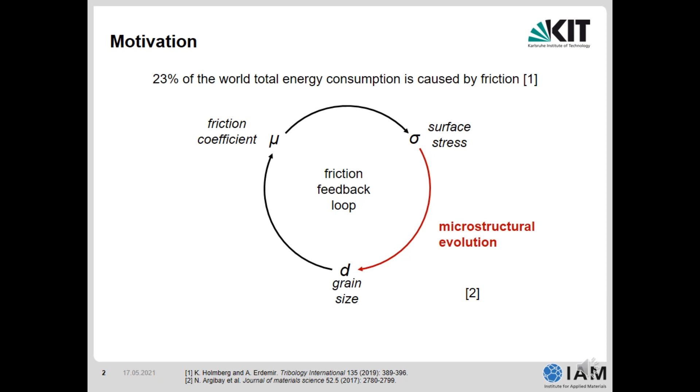In my group, we have a special look on this part of the friction feedback loop, which is the microstructural evolution. And we have a special look on the very beginning of microstructural changes. And so one of our main questions is, how do metals and alloys deform under tribological load after a single trace experiment?

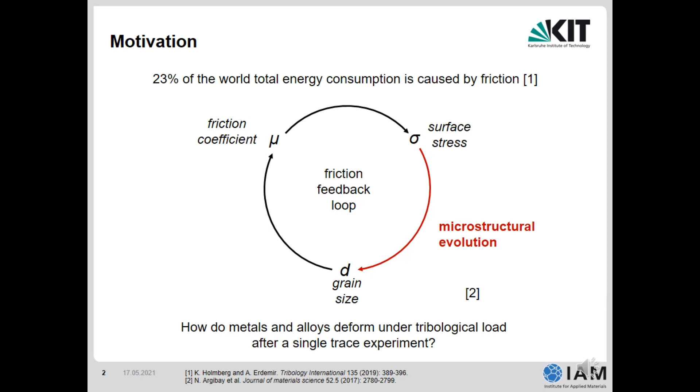So here you can see how it all started. First of all, we investigated polycrystalline copper. This was electropolished to achieve a defect-free surface. As counterbody, a sapphire sphere with a diameter of 10 mm was used. Furthermore, we have a normal load of 2 Newton and a sliding velocity of 0.5 mm per second.

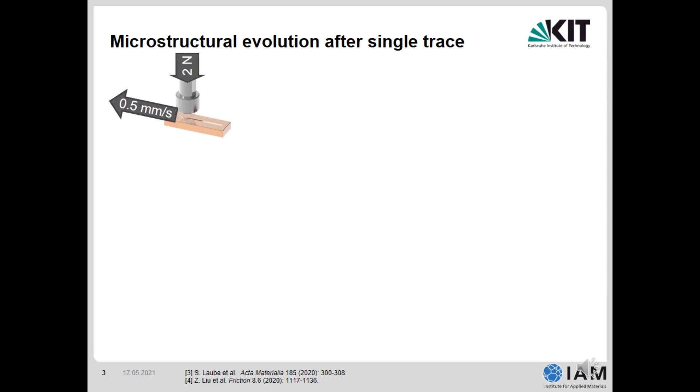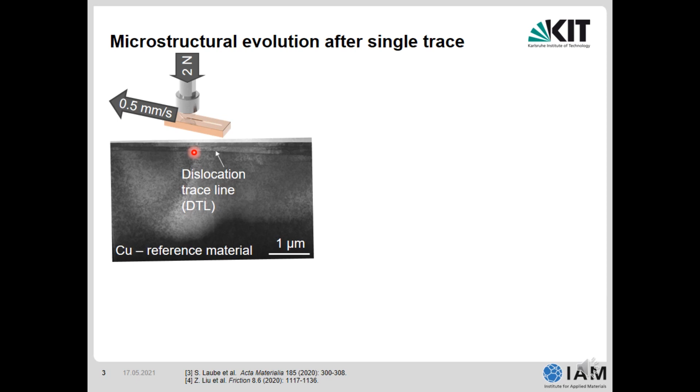So in the next step, we added manganese to copper to investigate the influence of the concentration of solute atoms. An increase in the manganese content does not change the stacking fault energy. So you can see here that there was still a formation of the trace lines, so there is not a huge influence of the solute atoms.

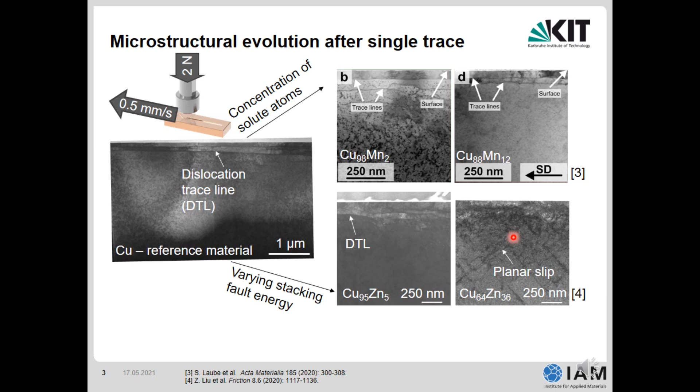In the next step, we have here a brass system, and here the stacking fault energy decreases with increasing zinc content. So here with the lowest zinc content, you can still see a dislocation trace line. So here's also the higher stacking fault energy, and with the lower stacking fault energy, we can see planar slip.

And in my case, I'm investigating CoCrFeMnNi. So this is an alloy with a really high content of solute atoms, and it has also a low stacking fault energy, so we expected a behavior like here in this brass. And my question today is, how does this alloy deform under tribological load after a single trace experiment?

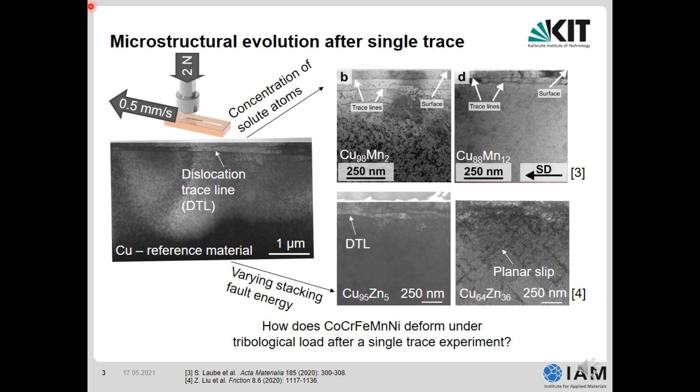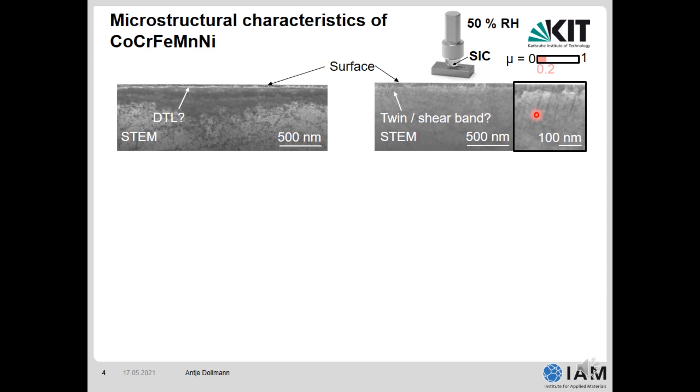To further investigate that, I have done TKD measurements. TKD means transmission Kikuchi diffraction, and it's the same technique as for EBSD. So both of the TKD measurements are shown here in sliding, normal, and transverse direction. Furthermore, I have plotted low angle grain boundaries in green, high angle grain boundaries in red, and twins in blue.

So in the first grain, we see here this small angle grain boundary. So this is again a higher magnification of the surface near area. And we have also seen before that the dislocation trace line often has a low angle grain boundary character. And here in the second measurement, unfortunately, the resolution of the measurement is too bad, so we cannot say what these bands are.

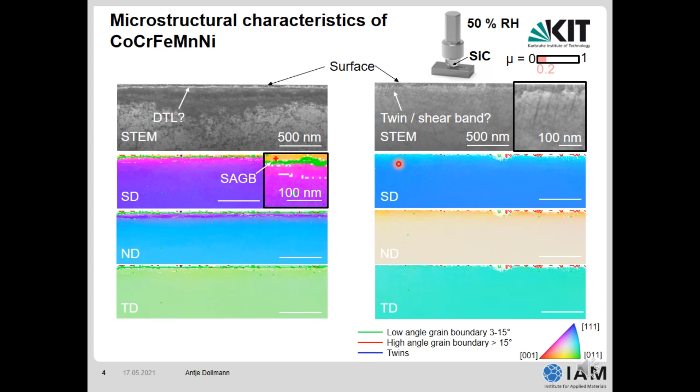So here you can see the high resolution TEM image, which was done at the Institute for Nanotechnology at the KIT. So thanks my colleague Lakshmi Manta for that. So here is now the surface, and here is the line type characteristic. Here you can see the FFT analysis, and the red dashed line connects the diffraction points for the twin and the blue for the matrix. And now we can see here that this was clearly detected as a twin, and down here there's the twin not anymore.

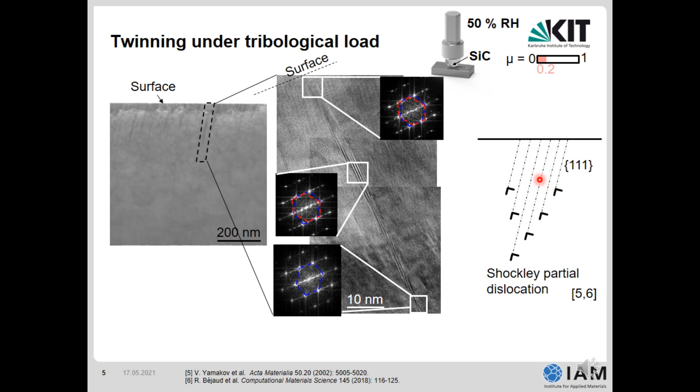So I had a look into literature, which kind of mechanism can form such a twin. There's at one side the Venables mechanism, but for such a mechanism, the distance between the surface and the depth of the twin is too small for such a source to form. So by MD simulation, such a twin formation mechanism was shown. This means that Shockley partial dislocations start here at the surface and then glide into the material, and this is done on several neighboring 111 planes. And this is how the twin forms. So what we learn here is that these line type characteristics are twins, and for me it seems like the twins form at the surface.

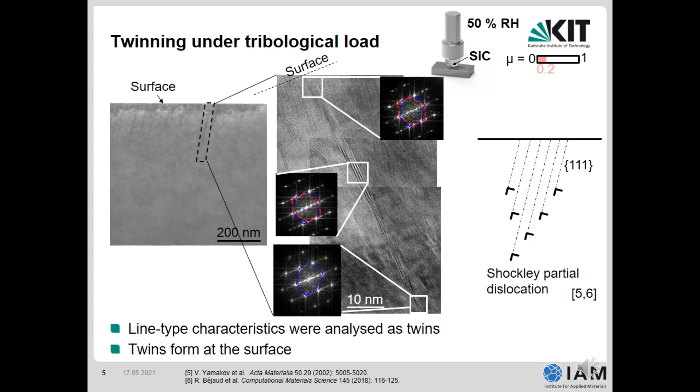I have used the TKD measurement also to investigate the misorientations. So here I have analyzed the misorientation profiles along the arrows in the TKD measurement. The distance of 0 microns means that there is the surface, and 0.8 is in the bulk. And so we see that the misorientation has in both grains a strong increase starting at around 0.2 microns. And in the red profile, there's also a discontinuity, and this matches with the dislocation trace line. Furthermore, we have also a difference of around 25 degrees in the maximum misorientation of the two grains. And I think that this comes from the different initial grain orientations.

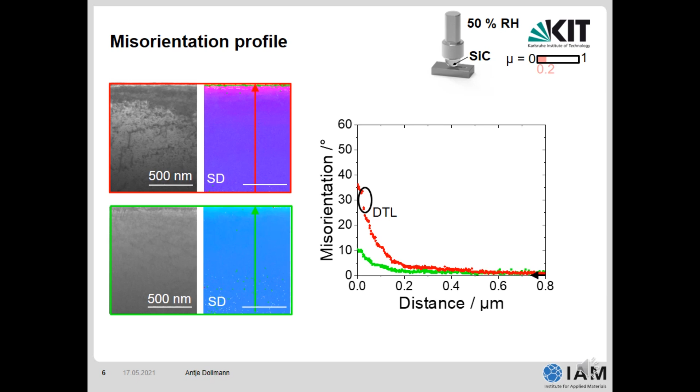We used the TKD measurement also to investigate the lattice rotation. Therefore, I have defined here these rectangles, and the orientations within these rectangles were plotted in inverse pole figures. Down here you can see the inverse pole figure in sliding direction. Furthermore, the initial grain orientation is marked, so here by a G, and also the surface orientation here and here. I usually compare these to what happens under uniaxial load because this is easier for me to imagine. And here in both cases we can see that the orientation rotates along a bisector, which is quite well known from uniaxial tests because here two slip systems are activated.

And then something unexpected happened. So here close to this 113 direction, the orientation leaves the bisector. And one reason could be that the stacking fault behavior changes along this dashed line. In uniaxial tensile tests, the stacking fault width increases here in this part and decreases here in this part. And under compression, it's vice versa.

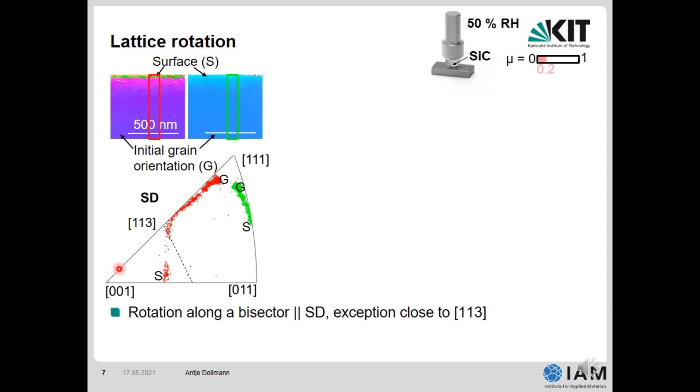And I actually think that this could be the reason why it's not furthermore rotating along this bisector. So we have seen that parallel to SD, the rotation is along a bisector with an exception close to the 113 direction.

And now we will have a look on the normal direction. Here we can see that it's rotating in the green grain from here to here, and in the red grain it's reflected at the bisectors. So here one time, here a second time, but this is quite normal based on the projection.

I usually ask myself which direction is the responsible one for the twin formation, and therefore I have a simplified model which you can see here. I actually think that there is compression parallel to SD, then compression parallel to ND based on this normal load, and then here behind the sphere tension parallel to SD.

And now we have a look on the inverse pole figures. We see here that the initial grain orientations are quite close to each other. So I actually think that SD was in this case not the important direction for the twin formation.

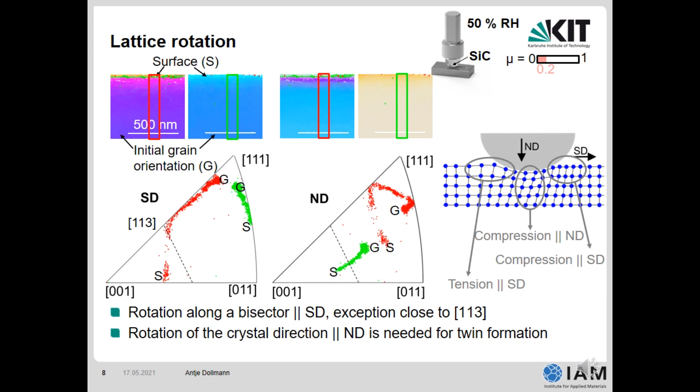Okay, then let's also have a look in the transverse direction. There we see the lattice here, it's quite stable. So we have nearly a rotation around the transverse direction, which was also shown before in literature.

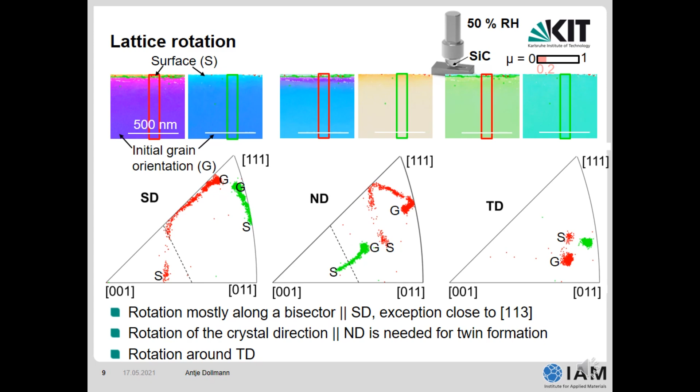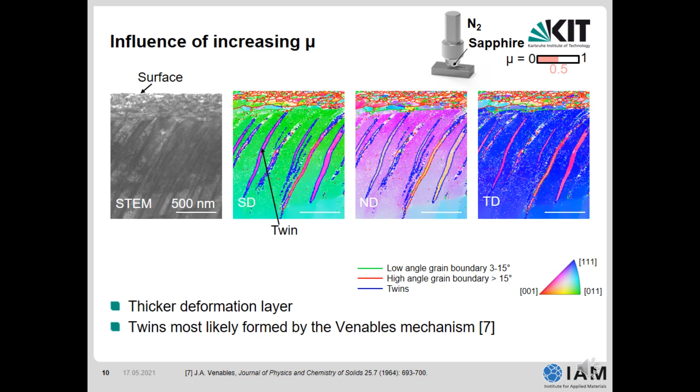So then we see also a nearly straight grain boundary, and above that you can see the elongated subgrains, which were also published by Hughes and Hansen. Directly below the surface you can see some nanocrystalline grains. So here we have now also two zones, one which is dislocation mediated, and in the other zone we can see twin-induced plasticity.

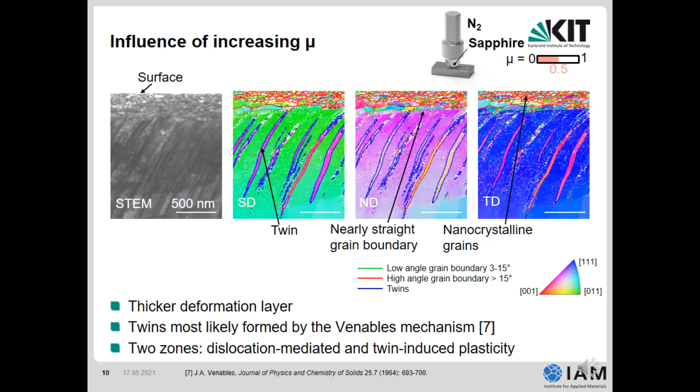Summing this up, we have seen different microstructural characteristics, which are the dislocation trace line and the twins. And it seems that the leading deformation mechanism depends on the crystal orientation. For the twinning mechanism, we have seen two different formation mechanisms: on the one side, the glide of stacking faults on neighboring {111} planes, and on the other side, the Venables mechanism. And it seems that lattice rotation can promote the twin formation.

Concerning the dislocation trace line, we have seen that this can also be formed in a material with a medium stacking fault energy, and it has the small angle grain boundary characteristic parallel to the surface, as we have seen before in copper and its alloys.